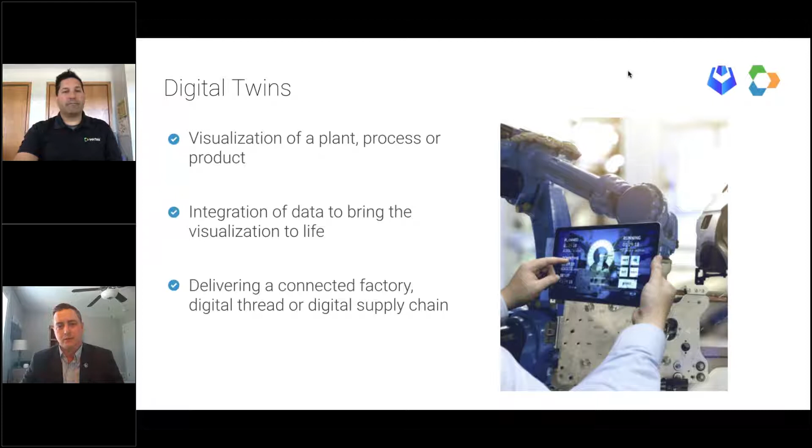In most manufacturing cases, it's taking the physical environment, piece of equipment, or entire factory and digitizing that environment so it can be accessed with ease from anywhere. The integrated data from connected switches, IoT devices, ERPs, PLM systems, and various other data sources gets you that digital twin.

The first one, maintenance. This is a no-brainer, this is the OEE uptime that the oil and gas industry had realized early on. It's really taking the 'fix it when it fails' mentality and cumbersome PM plans and moving to condition-based monitoring and predictive analytics with the use of digital twin. So instead of waiting till something failed on the shop floor, you're using those connected sensors and switches, integrating them to your performance indicators and really getting ahead of those failures inside maintenance of the manufacturing facility.

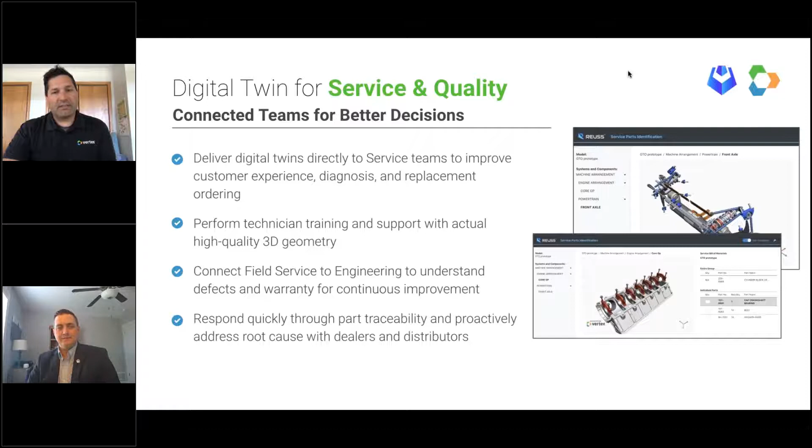So now, Alan, I know more specifically some things related to that with C5MI. Yeah, thank you. And I think as you look at Vertex and C5MI and the digital twin...

With the Vertex solution you'll see here in a little bit, it's around the product and having that available. At C5MI, we've taken the digital twin and taken that product digital twin, but we've also been extremely successful in illuminating and providing insights of the plant and process—those other two aspects of the digital twin.

One of the things we like to call is a product called Live Factory, and it's connecting the enterprise from your shop floor to your top floor. It's providing actionable insights in that common operational picture I alluded to earlier. Really, it's a suite of solutions that can transform your professional lives, just like the iPhone has transformed our personal lives. Why don't we have the same access to information in our business world and manufacturing that we have on our smart devices?

So, line of sight to instantaneous and in-the-moment data about manufacturing results—so your teams, your operators, all the way through your leadership, can make and take timely, actionable decisions to impact your performance on the shop floor. That's really about Live Factory and the ability to give those insights from the shop floor to the top floor.

Revolutionize your processes with digital reliability centered maintenance. Every organization believes its production methodology is unique. While underlying details may be different, all manufacturing organizations face similar maintenance asset challenges. Siloed information leads to incoherent data and lacks a single version of the truth. This generally accepted run-to-failure approach only addresses immediate impact, resulting in increased maintenance cost and volatility. Without a proactive maintenance approach, equipment breaks down without warning, leading to unplanned downtimes. This can result in increased operational cost and quality defects, ending in low yield and throughput.

The C5MI DRCM solution architecture and implementation methodology, blended with accelerators, will address these challenges and drive transformation across the asset maintenance lifecycle. Our best practices in equipment hierarchy definition play a vital role in driving transformation across the plant maintenance ecosystem. DRCM brings together equipment-related information and all stakeholders.

This establishes a collaborative, single version of the truth as the asset common operational picture. Our expertise in accelerators in risk and criticality, as well as failure modes and effects analysis, will help drive a lean maintenance strategy across any manufacturing enterprise.

Expertise in equipment hierarchy, coupled with our robust CBM template, will set the stage for asset digital twin, condition-based monitoring, and predictive maintenance. Using the mobile-enabled DRCM solution will deliver increased worker efficiency and data accuracy.

C5MI experts are trusted business practitioners with decades of experience managing plant maintenance systems, shop floor operations, and manufacturing supply chains for Fortune 100 organizations across the globe. We architected DRCM with a futuristic vision of aligning organizations to the Maintenance 4.0 roadmap by merging people, process, and technology. Let us bring your manufacturing maintenance execution into the next century and beyond.

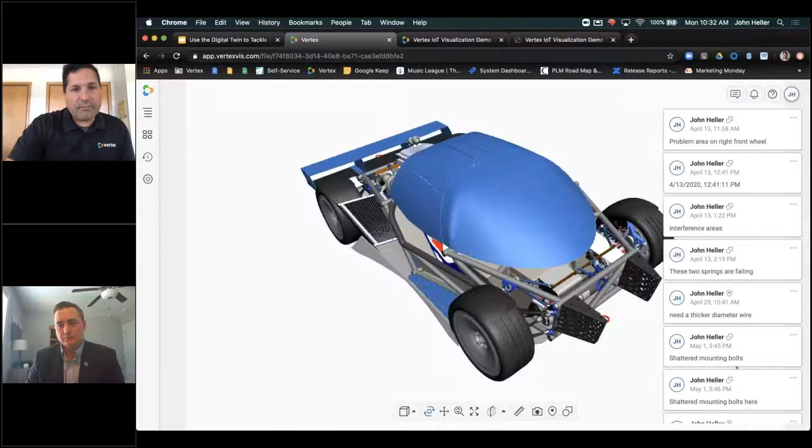One of the things we take great care in, as Alan and I have alluded to leading up to this, is that you don't want to create multiple systems of record that then give you orphan data, with no way to tie it together and keep it as one picture as you're moving it through your organization. Vertex provides ways to do that. So when we think of a digital twin, as you can see here, I've been able to very quickly pull up a full 3D model of a concept vehicle here.

This digital twin, this representation of this supercar. And as I alluded to earlier, a barrier in most organizations is the hardware and software limitations of being able to do that.

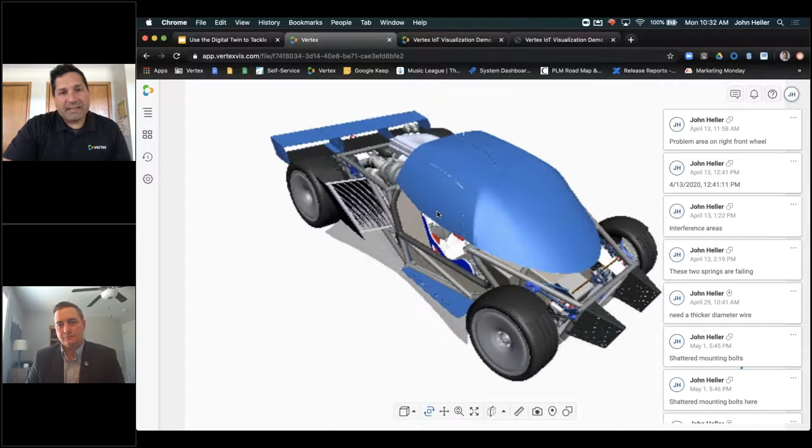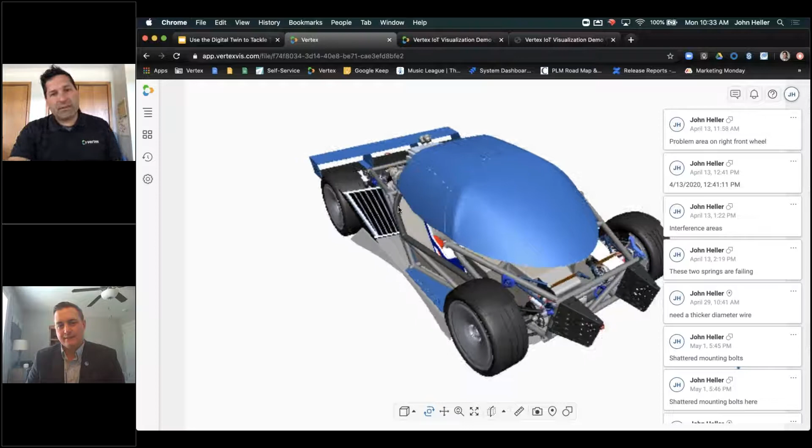Since Vertex is a 100% cloud-based solution, when a model is loaded into the Vertex platform, we scatter it across multiple cloud servers. Then when you call up an image like this, from any device, we render that image and stream it down to your device. Each time you interact with it, we're recompositing that image, rendering it, and streaming it down to your viewing device so you're able to interact with it.

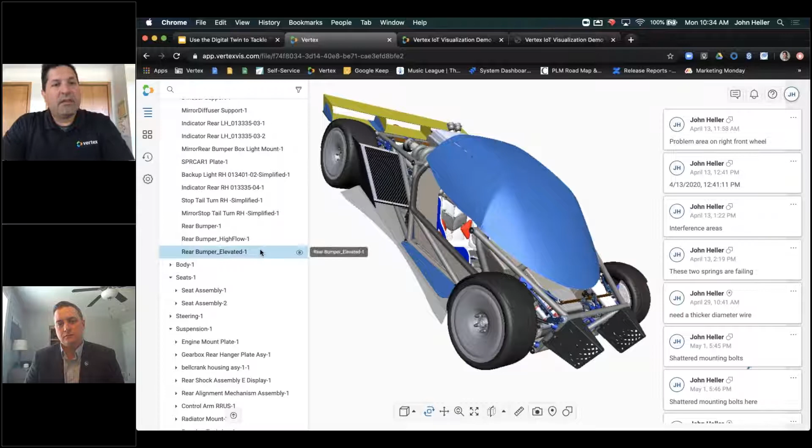This is what truly sets us apart in being able to offer digital twins throughout your organization, independent of device, independent of heavy and expensive software licensing, being able to access the full visuals tied to your bill of material, as you can see here. If I select this rear spoiler, you can see it's highlighting the appropriate spot on the bill of material.

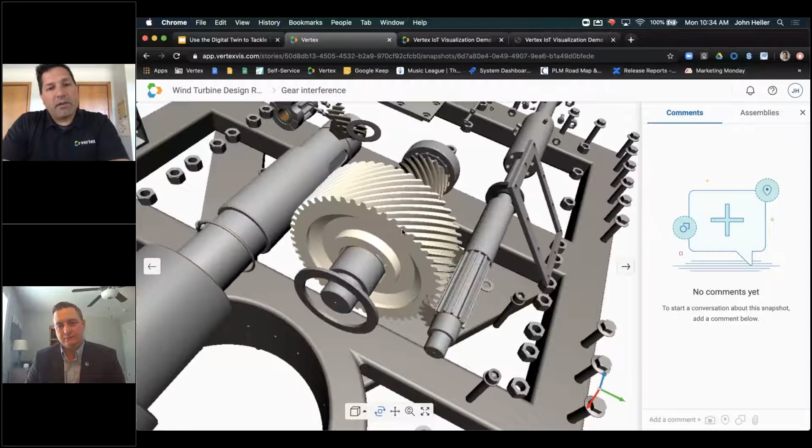We're also able to, when we think about the digital twin, enable collaboration by getting that information out to your other resources. A common example could be a design review. Here we've got a design review, and this story was put together from snapshots of that 3D image in the model viewer, stepping through various issues in a design review or product that denote areas needing to be resolved.

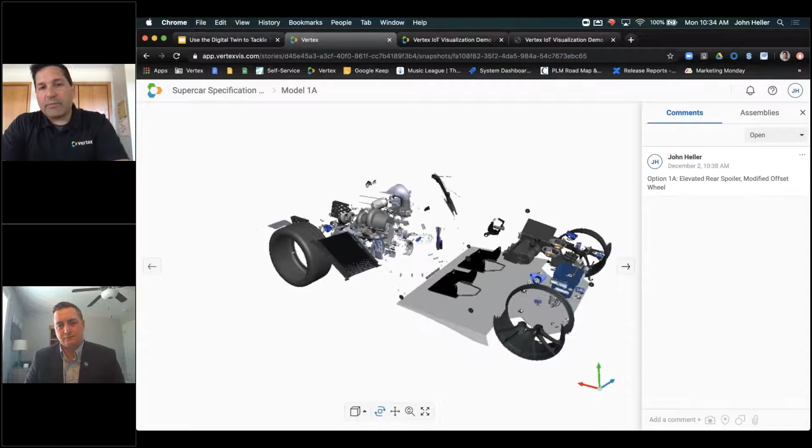Another common use of the digital twin is getting this out to a customer, say if an organization wanted to take this digital twin representation and break it down from a 150% bill of material into different configurations. This one has a certain rear spoiler, and if we navigate to the next slide, you can see that rear spoiler option changed. So being able to present your information in a way that's easily consumable to your downstream teams and to your supply chain and customers is very powerful.

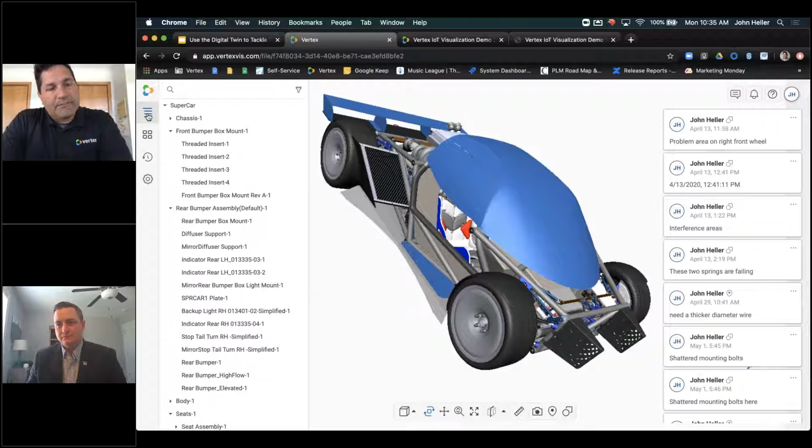I'll give a quick example of how interactive this can be in getting that digital twin out. Let's say we want to understand some rear spring issues here. Vertex is able to bring in all the metadata properties associated with that. If I type this in, I'm going to pull that up and search for a rod assembly.

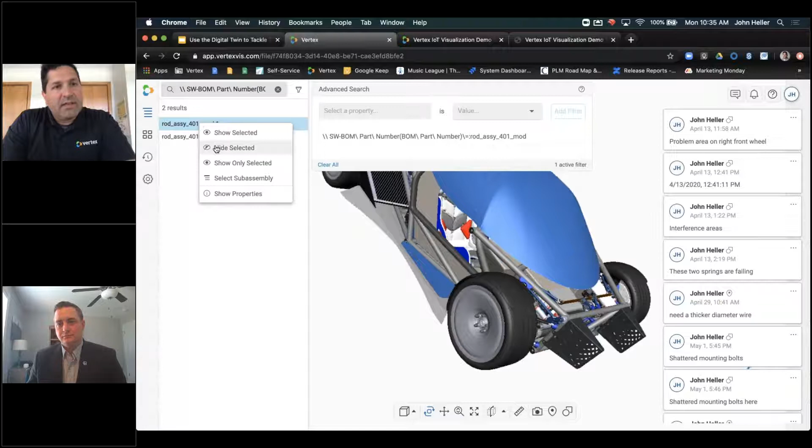I'm going to throw that filter on, now I've got that part. Since I don't know visually where that part is, I'm just going to select it and do a show-only-selected. That's going to bring that part into view, as you can see on my screen.

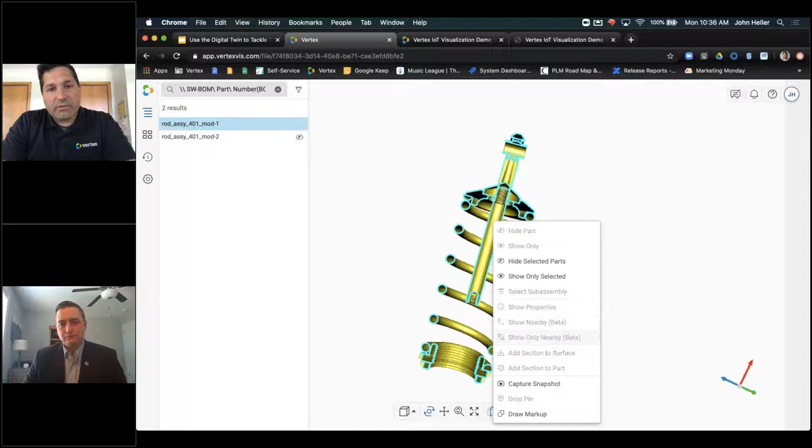Now I want to start building in some context, so let's say I just want to put a quick cross section on that. I'm going to add a section to a part here and flip that around so I can see it. Now I want to bring in some parts around it so I can start telling my story with this digital twin representation. I'm going to do a show-only-nearby, want everything within 5 millimeters, and apply that. That's going to start building in the components around it.

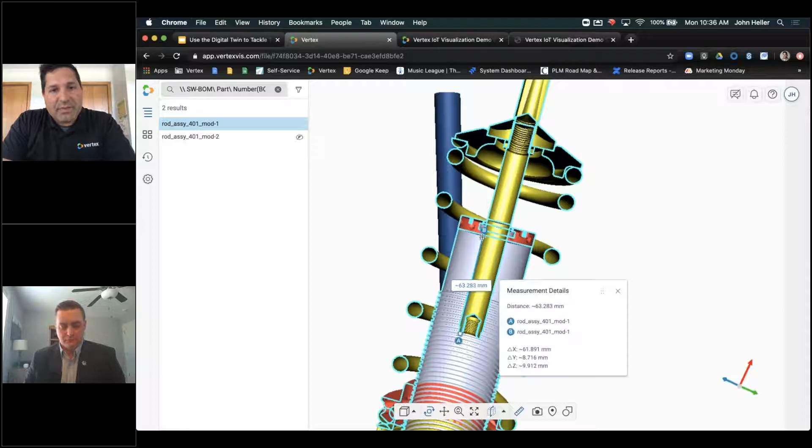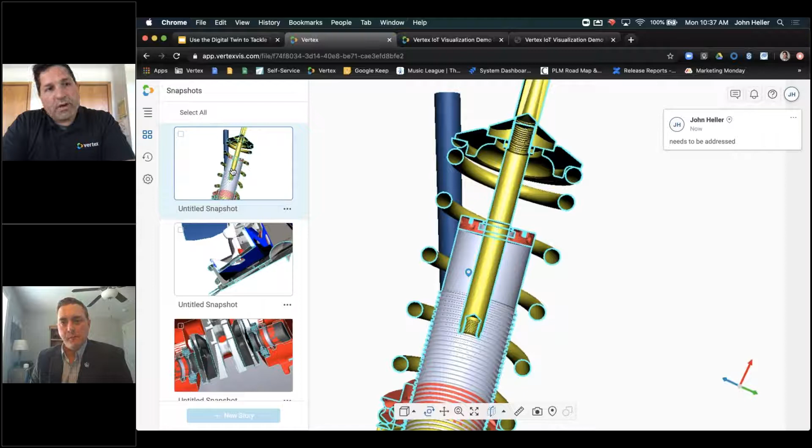Say, for example, now I know there's perhaps an issue with a dimension here. I'm going to come in and snap a dimension along that, and pop in a comment as well saying it needs to be addressed, and add that pin to it. Now when I created that comment, I've got that snapshot created on the left-hand side. I can quickly take multiple snapshots and very quickly put them into a story. So if I grab a couple and click create a new story, I'm able to come into this spot.

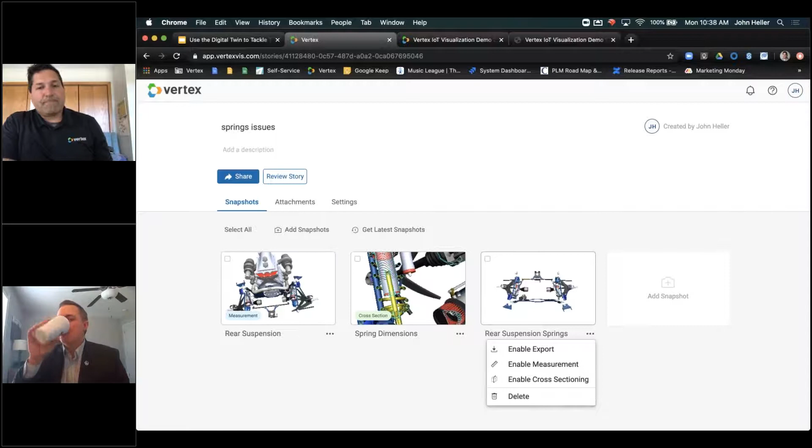For example, if I want to enable my collaborators to perform measurement on here and cross-sectioning on this slide and nothing else, and perhaps this one, I don't want them to do anything on that. I just want them to have a visual representation on that. Perhaps I'll come back in and add the ability to export that.

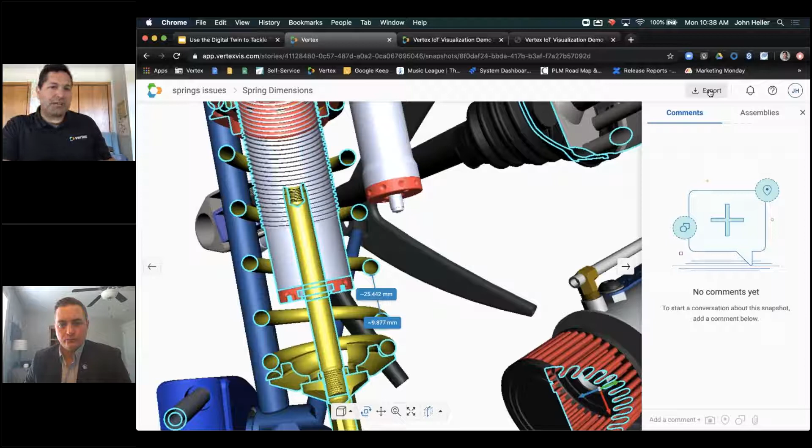So now what I've done essentially for this snapshot only is I've enabled my collaborators to be able to come in and export out this geometry into their system, perform the needed changes, and upload perhaps back in here as a comment. You can come in and you can attach designs, docs, whatever they might be into this story.

So when we think about the digital twin, this is a very easy way for organizations to adopt digital mindset, digital transformation, and being able to get that digital twin out of engineering downstream to other groups and organizations.

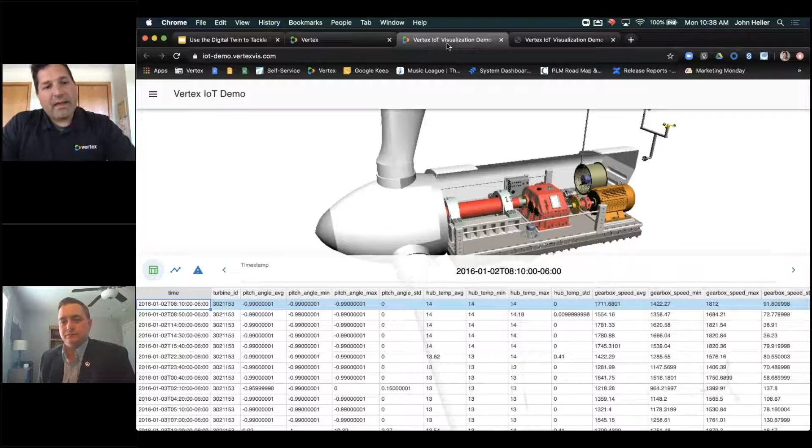Real quickly, as we talked a little bit more about the manufacturing side of things, when we think about connecting your information, your 3D product data to your MES system, your performance data, your IoT sensor data, many times we see companies struggle to really adequately bring together the high fidelity 3D visualization, tie it to their data, and being able to see what the data is doing from a visual standpoint and being able to react.

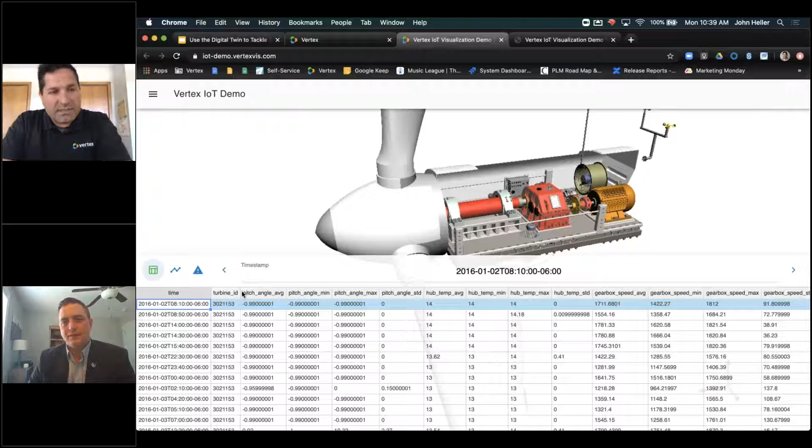A key piece that Vertex provides is the ability to provide powerful 3D visualizations. You can think of us as sort of the visualization engine for all of your data within your organization. So this one here, we've tied in this wind turbine, again being able to fully interact with it, and it has been linked to the sensor data.

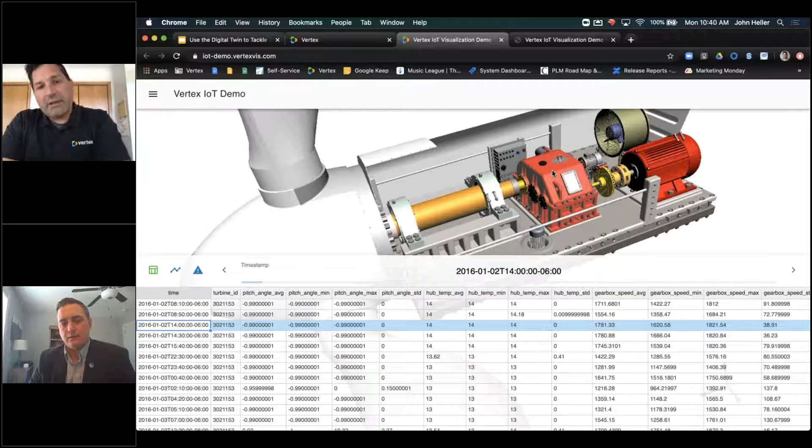And so as you're stepping through the data here, you can see the impacts, some of the warning signals that are perhaps coming up as you step through their individual timestamps, indicating that at this point in time, due to some speeds and the temperatures, your motor and your gearing could fail out if this continues.

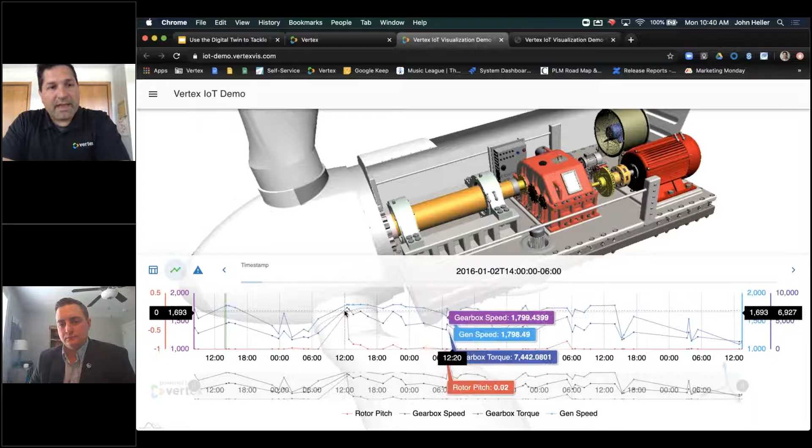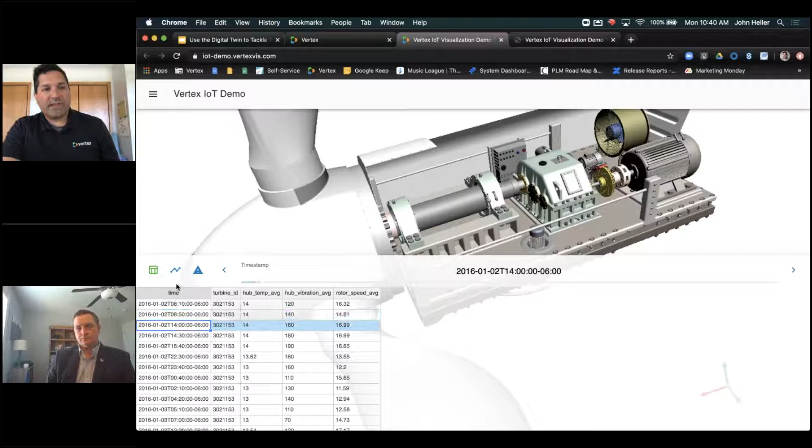Also being able to tie that directly to various chart data as you step through. As well as being able to generate fault codes. For example, if something on this data is starting to alarm out, then being able to quickly see a sort of this bearing end of life warning pop up. And then if I were to go through to that, I would be able to see, as we step through these various timestamps here, that is being captured.

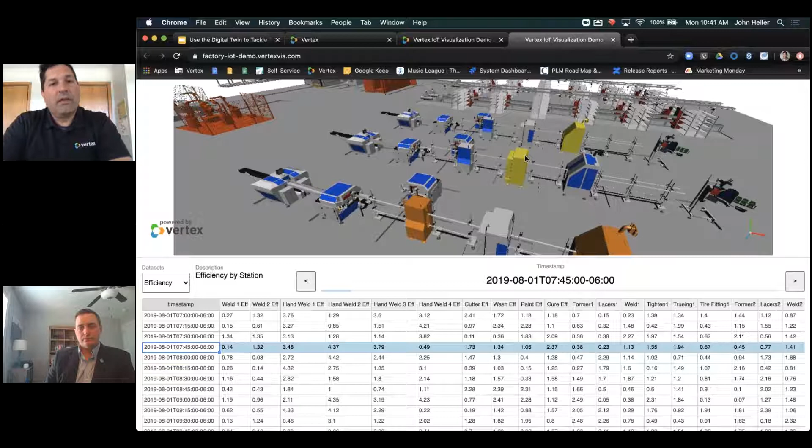Another way we can see digital twins being tied to factory floors is perhaps in workstation efficiency. So again, being able to bring up an entire factory layout in a very easy manner. And again, I'm just running this off of a basic laptop.

This image is being streamed down to my device, requiring no heavy lifting on my device at all, since nothing is being cached down. And so here, being able to again see the impacts of sensor data as it's happening in real time. And if I were to step through here, you can see we've got perhaps different color codes starting to come up, indicating some inefficiencies perhaps in that workstation that could be addressed.

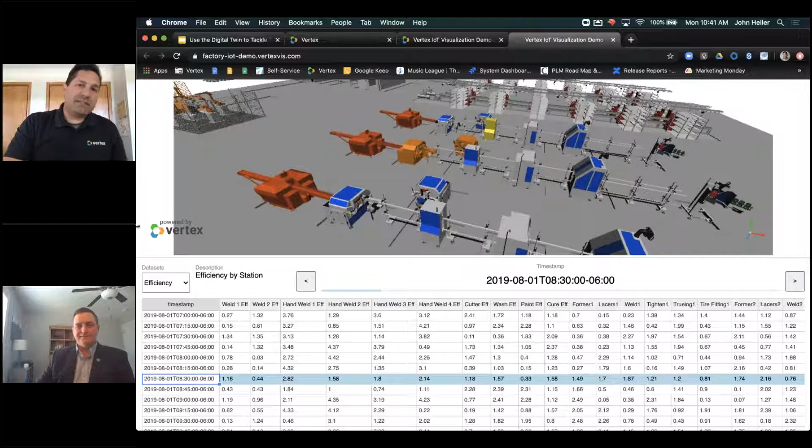And so just a brief overview again of the powerful ways that Vertex is able to connect your visual data with your context. And so Alan, I know both you and I, as we were kind of thinking of a way to summarize this, thought that it would be good to just kind of hit on some very basic value statements here based off of what we've seen in this space.

I know when we think about digital twin deployment, certainly, as I alluded to earlier, it can be overwhelming. And the data would indicate that as well. We see that traditional digital twin deployment costs can oftentimes more than double just your initial investment to get your foot in the door, as well as the expected implementation time.

If I would have one encouragement to our listening audience today, it's to look for those solutions that drastically reduce time to value, drastically reduce the implementation, reduce the hidden costs, so to speak, and being able to get that digital twin out and effective in such a way.

And Alan, I know you've got some stats here from Gartner. Yeah, and I chuckled every time you mentioned design reviews and engineering design and the communication between supply chain and material flow and containerization and the manufacturing organization, and just the hours that I've spent and my teams have spent collaborating, because Vertex has really found a solution to that.